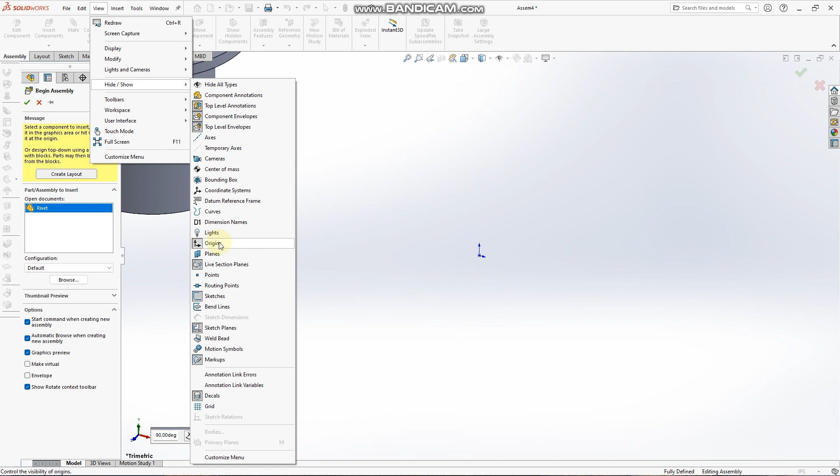Before we place the part, we go to View, Hide or Show, then we click on Origins so that our origin mark appears. We then put our cursor on the origin, and then we place our part.

Next, we click on Insert Component, then we click on our arm part. We place it at an appropriate position. We go back to View, Hide or Show, and remove our origin mark.

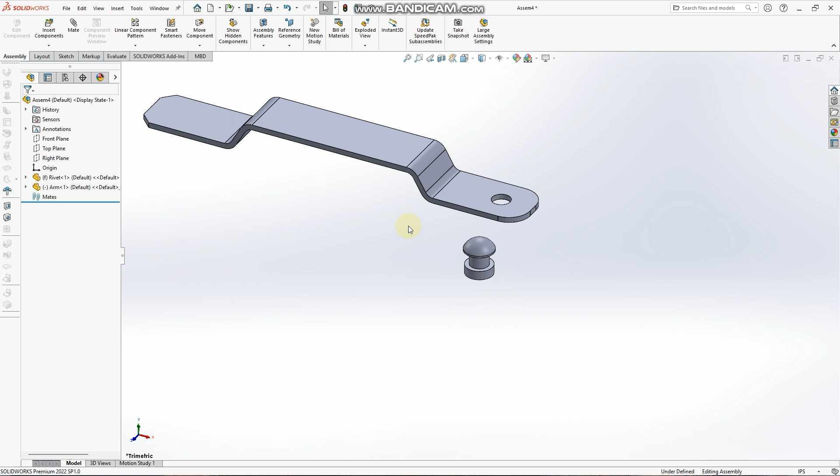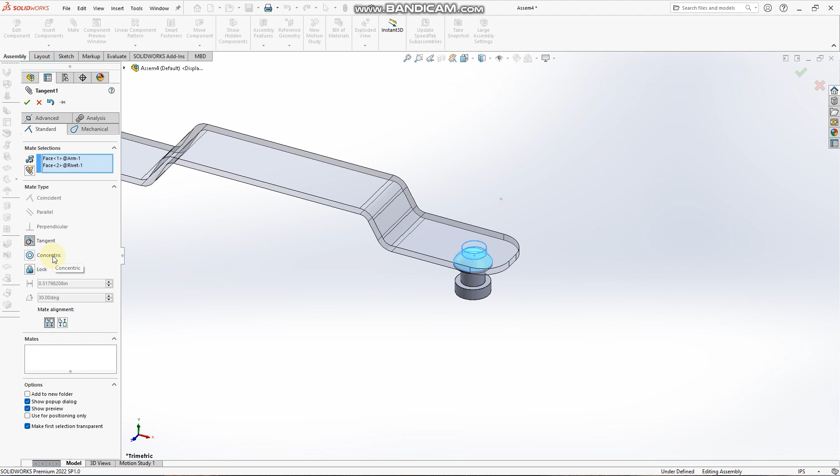Click on the inside face of the arm, the hole. We hold Ctrl, then we click on the cylindrical surface of the rivet. Then we click on Mate. Then under Mate type, we click on Concentric.

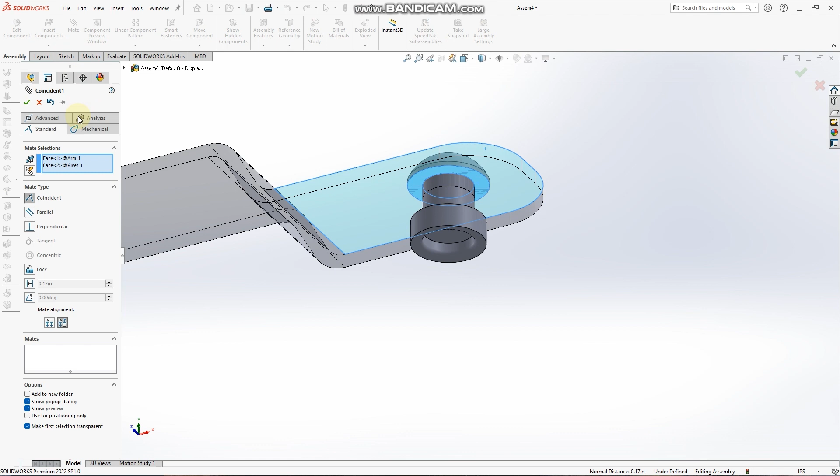Then click on the top surface of the arm, then we click on the bottom of the head of the rivet. Click on Mate, then we make it a coincident mate.

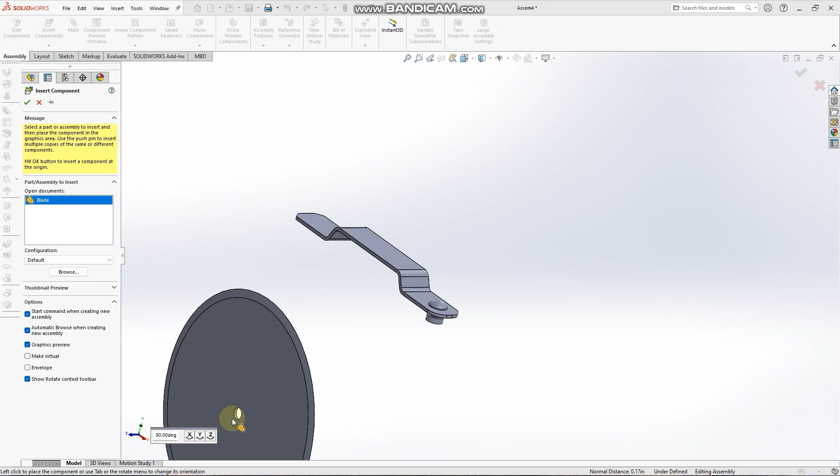Next, we insert our blade part. Before you place the part, there's this XYZ box that pops up. You can use it to rotate the shape and make it easier when mating.

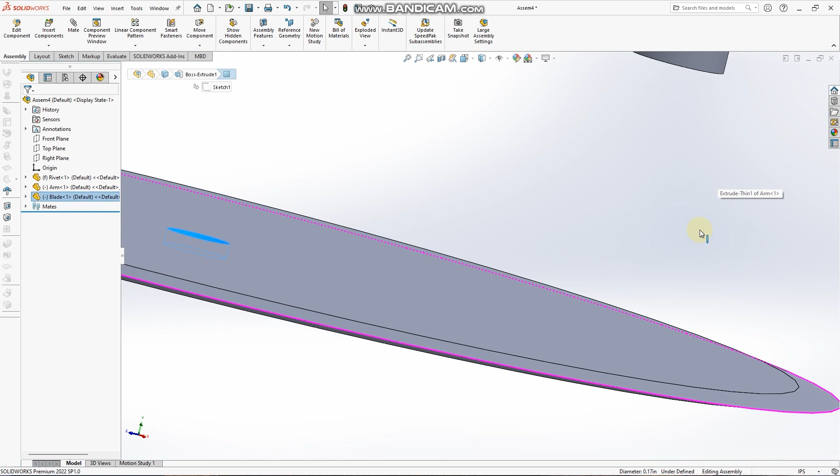We zoom in, we click on the hole face, the inner hole face of the blade. Rotate the shape, and then whilst holding Ctrl, we click on the cylindrical surface of the rivet.

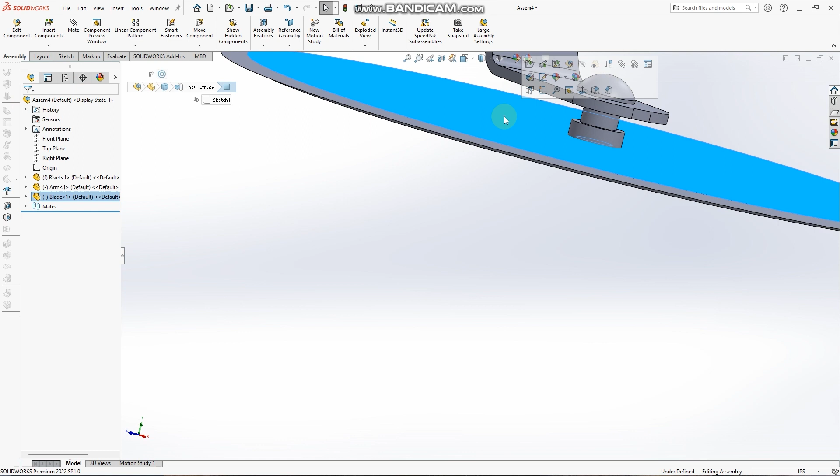We then create a concentric mate between these two faces. Next, we click on the surface of the blade. Rotate, let's bring the blade down.

Click on the surface of the blade. Rotate the shape, holding Ctrl, and click on the bottom face of the arm. Then we click on Mate. We make it a coincident mate.

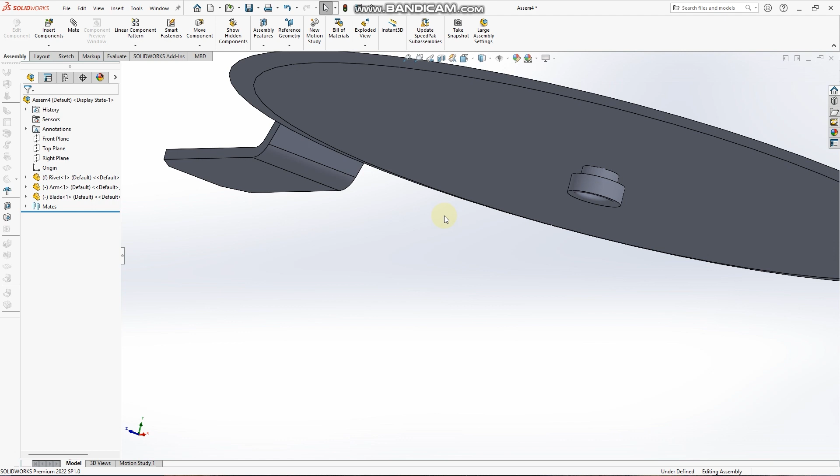Next, holding the Alt key, we drag from the arm to duplicate it, or you can either insert another arm from Insert Component.

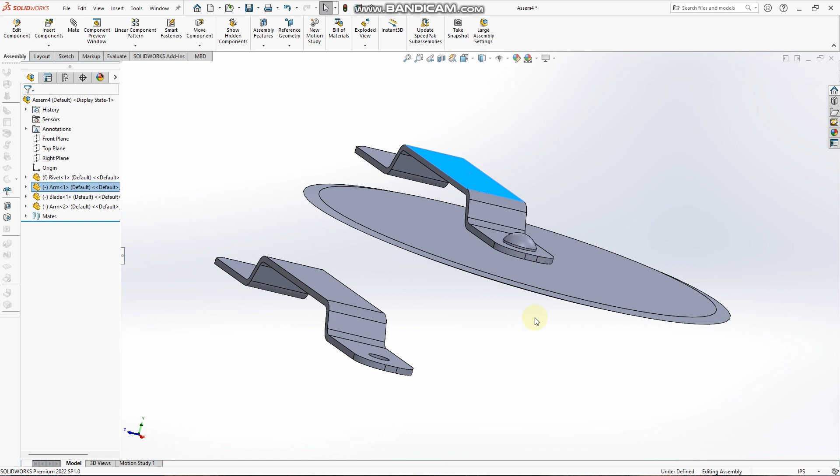Next, we come to our Feature Manager tree. Then we right click and click on Hide Components for Arm 1, and right click and click on Hide Components for Arm 2. We zoom into our second arm, click on the inner surface of the hole.

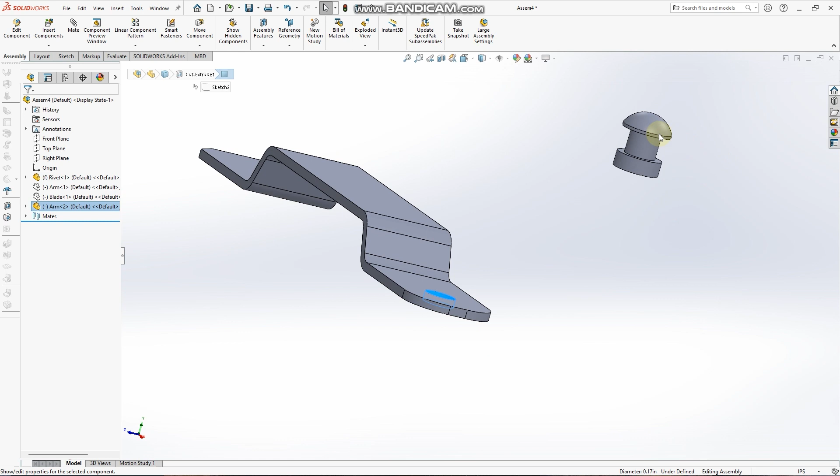Then we click on the cylindrical shank of the rivet. Then we click on Mate. We make this a concentric mate.

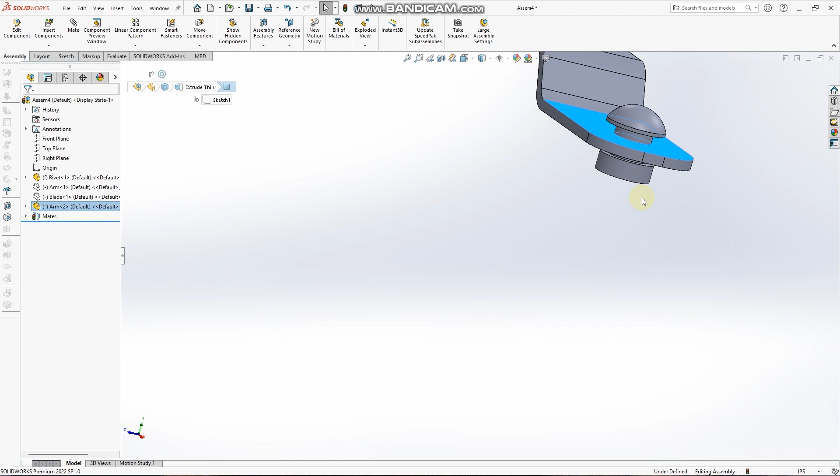Next, click on the top face of the arm. Rotate the shape, then we move this up a bit. Click on the top face, hold Ctrl, then click on the bottom face of the rivet.

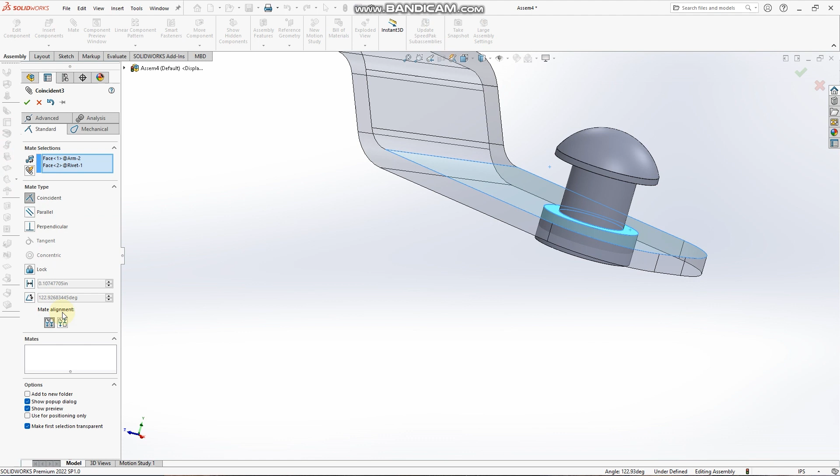Then we click on Mate. Then we create a coincident mate. Come down to Mate Alignment, then we click on Anti-Align. And our arm should flip.

We then show our first arm, then we show the blade.

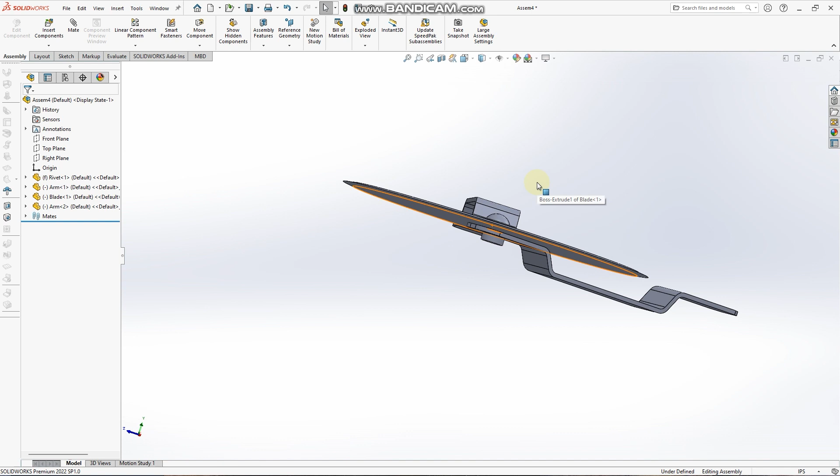To make it easier, you can move the second arm so that it's easier when we create the parallel mate.

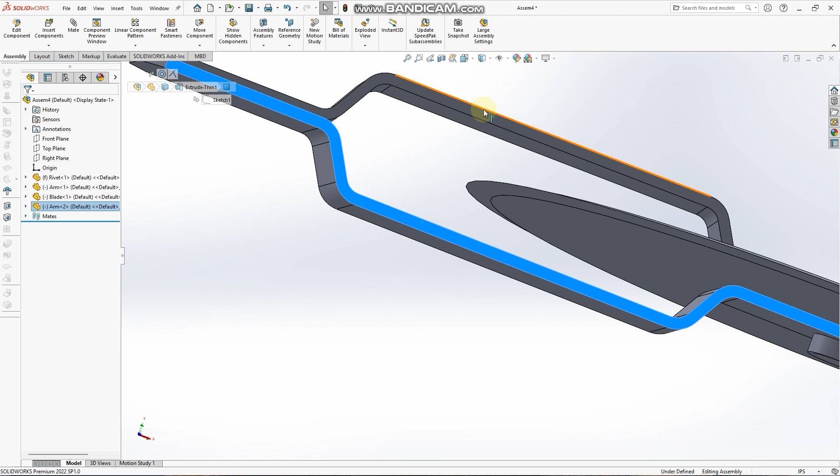So next, we zoom in, select this face of the second arm, holding control, then we select this face of the first arm. We click on mate, and under mate type we click on parallel, then we create the mate.

We zoom out, and now we have our completed mate.

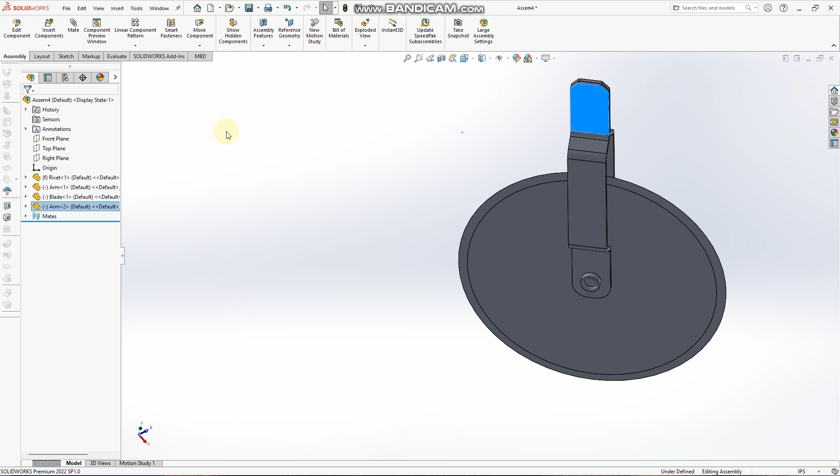We save our assembly as cutter assembly, and click on save.

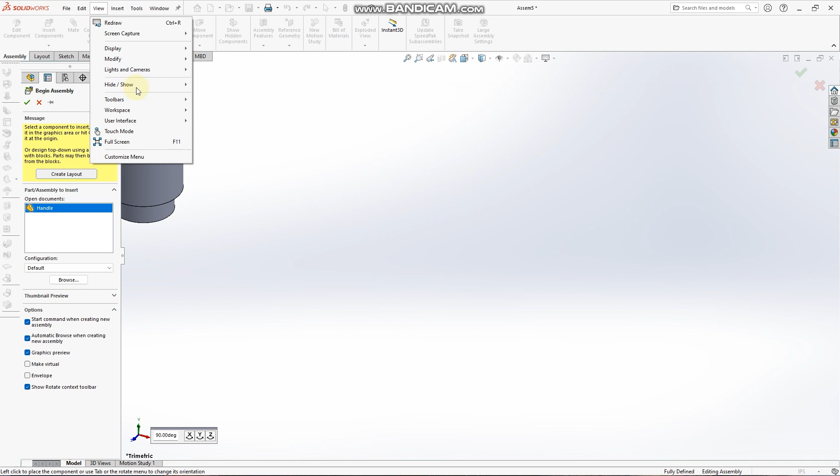We open a new assembly, and then for our fixed component we select the handle. Once again, before we place it, view, hide or show, then origins.

Click on this on the begin assembly tab so that it does not place our part yet. Move our cursor to the origin, then we click on it.

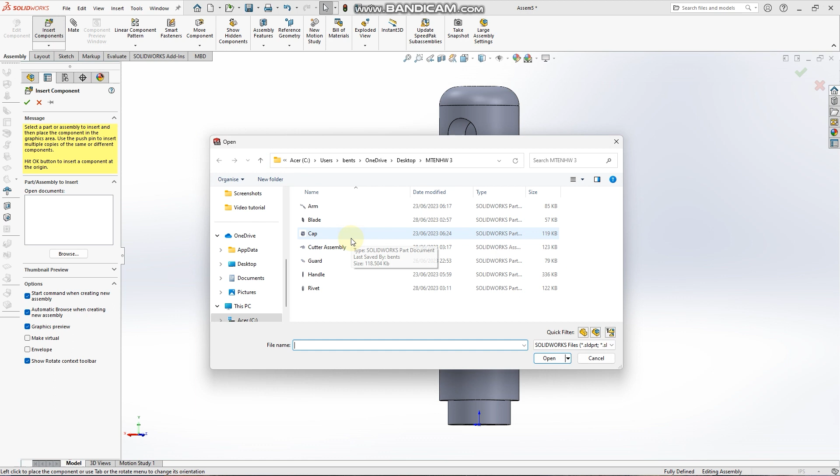Next, using insert components, we insert our cap. We use the XYZ box to rotate the cap to make it easier for us to mate. And then hide our origin mark.

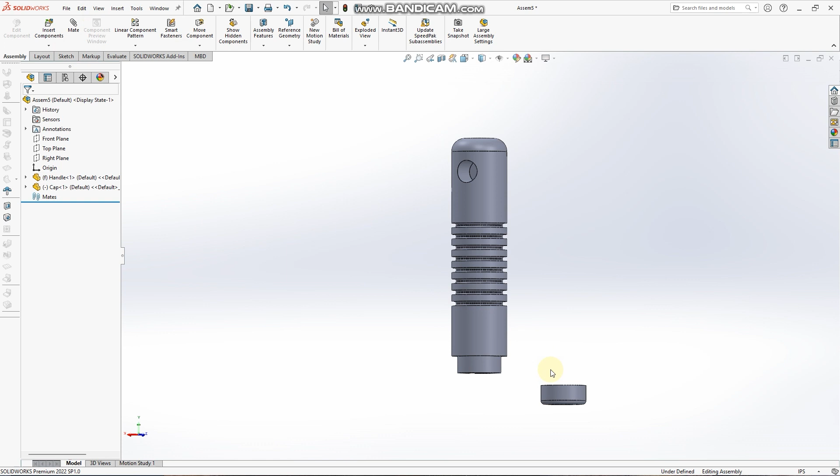Next, this face of the handle, and then we click on this edge of the cap, then we click on mate, then we create a coincident mate between these two faces.

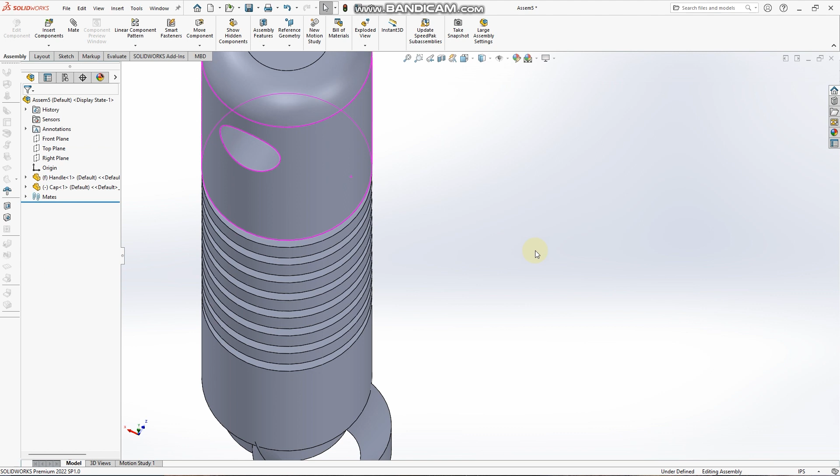Zoom out, we click on this face of the handle, holding control, and then we click on the inside face of the cap. Then we create a concentric mate between these two faces.

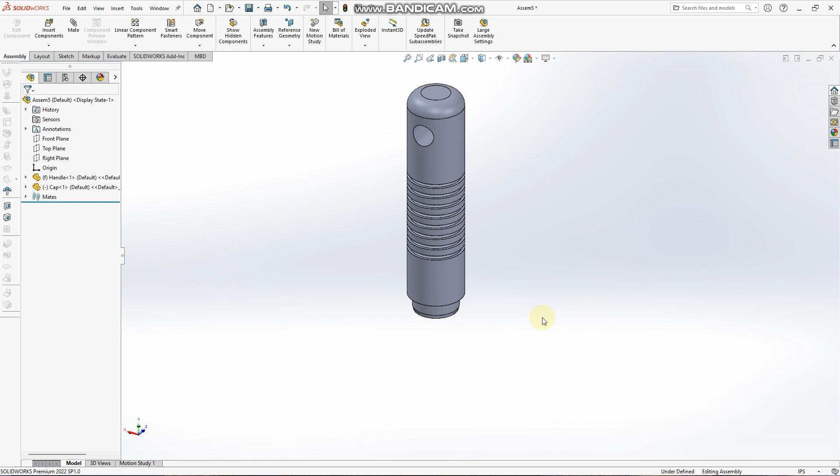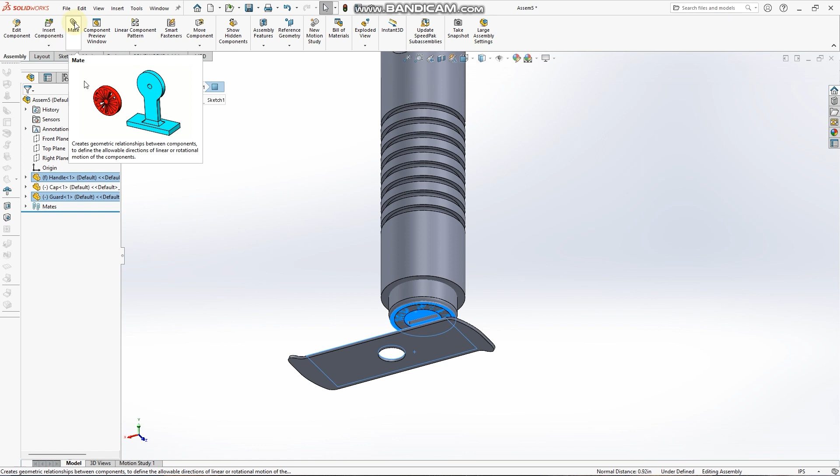Next, we bring in our guard. Then click on the top surface of the guard. Zoom in, click on our bottom face of the cap. Then we click on mate. Then we create a coincident mate between the faces.

Next, we click on the handle.

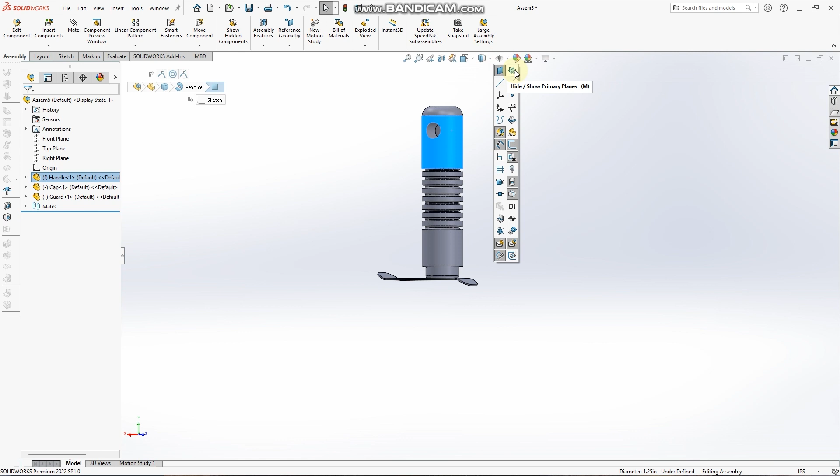We click on the handle, move to the eye icon, click on view planes, then hide or show primary planes so the planes of the assembly show. Then we do the same for the guard, clicking the eye icon and showing the planes.

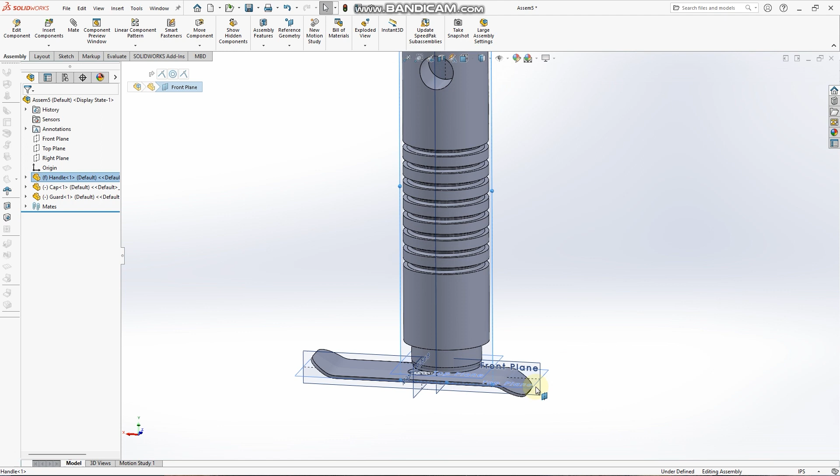Next, we select the front plane of the handle, holding Control we select the front plane of the guard, then we create a coincident mate between the two planes.

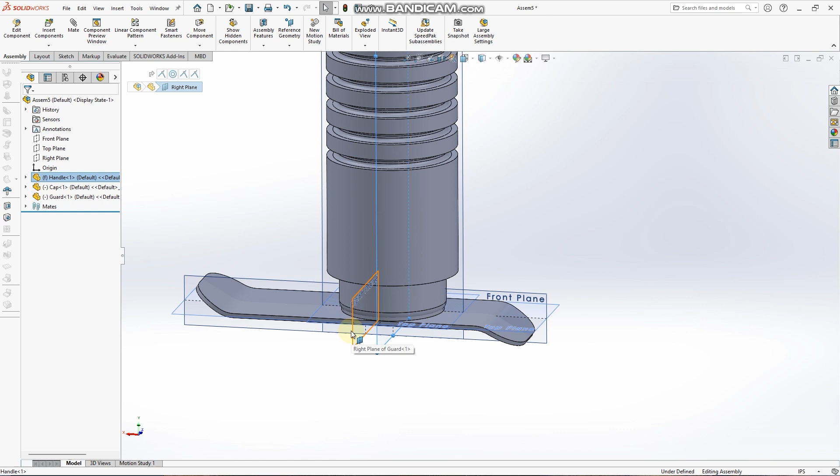Next, select the right plane of the handle, holding Control, then select the right plane of the guard. Then we create a coincident mate between these two faces. Click on the handle, the eye, then hide primary planes, and we do the same for the guard.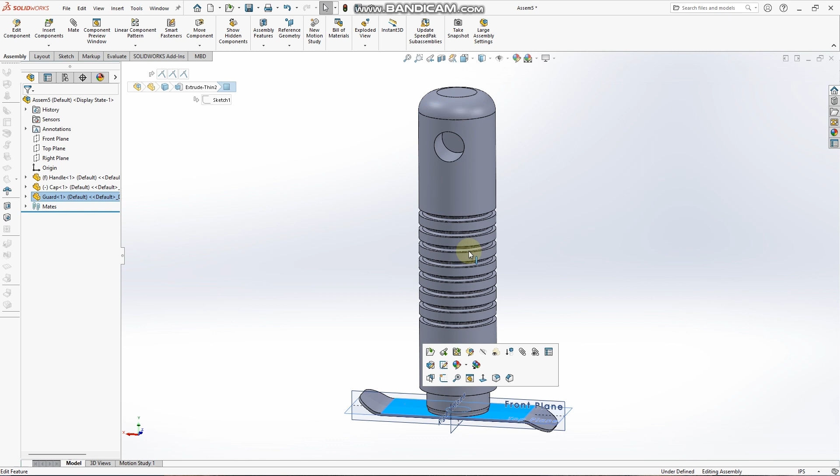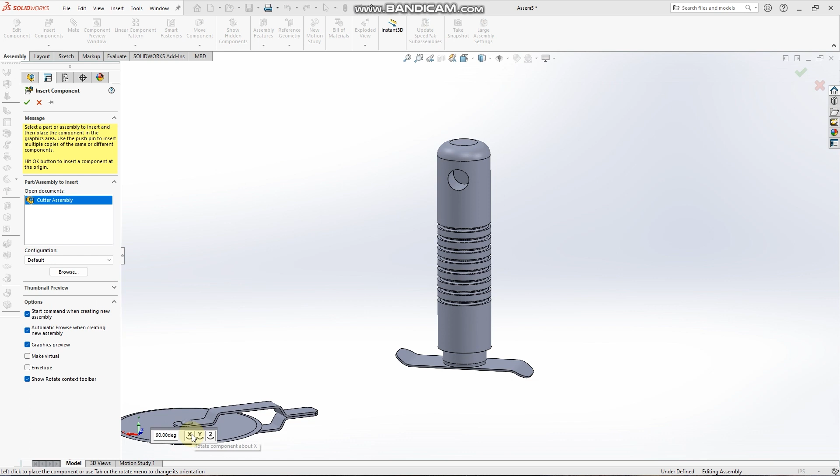Next, we bring in our cutter assembly using insert components. Using our X, Y, and Z rotations, we try to get correct alignment of the shape.

I think this will do. Let's bring it downwards.

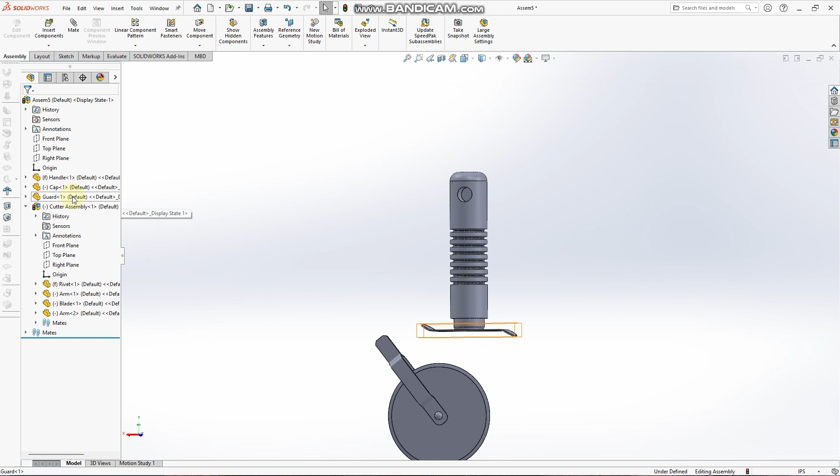Go to our design tree, then we hide our guard by right clicking and clicking hide components. Then we hide our cap by right clicking and clicking on hide component.

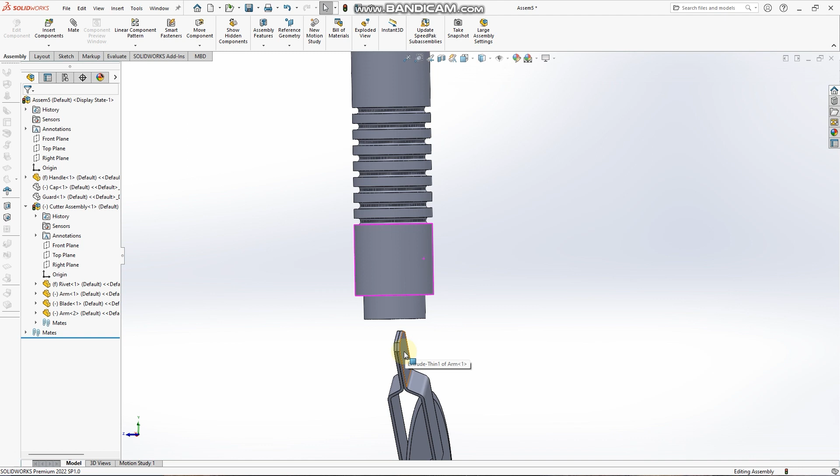We zoom in, then select this face of one of the arms. Let me position our cutter wheel.

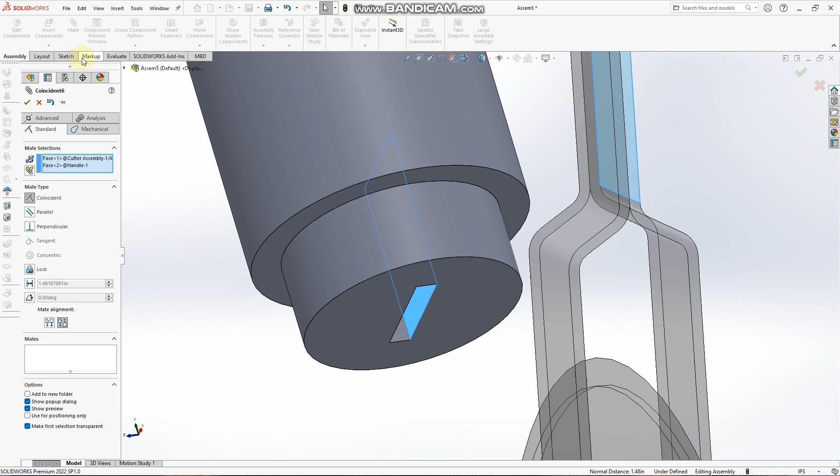We select this face, one of the arms, rotate the handle, and then select this inner face of the handle. Then we click on mate and create a coincident mate between these two faces.

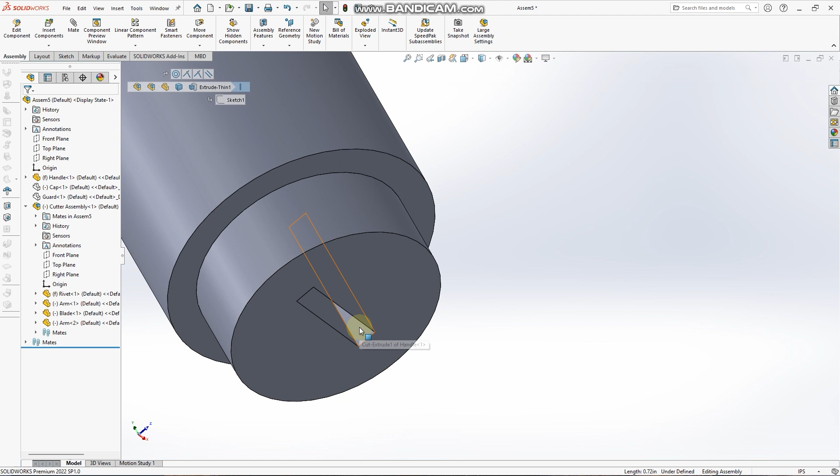On our cutter, we click on this edge between the two arms. Holding Control, we rotate our handle, then click on this inner face of the handle, then create a coincident mate between them.

So now we should be able to move our cutter through the whole of the handle.

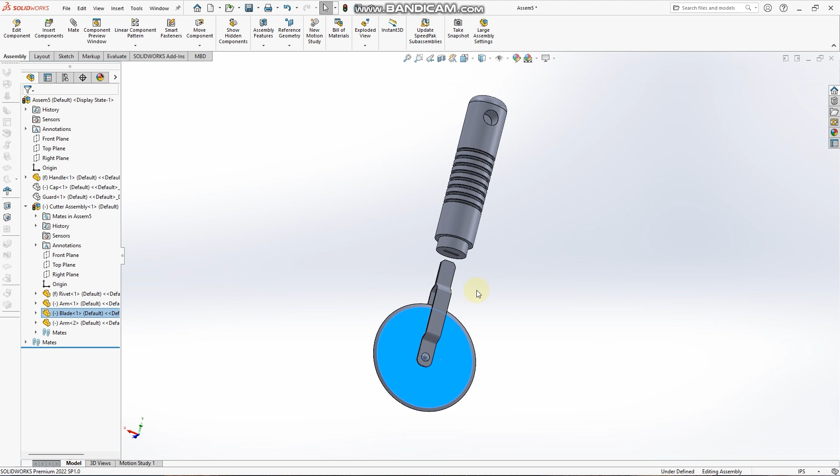Next, we show our cap, then show our guard. We zoom in and click on the bottom face of our guard, holding Control.

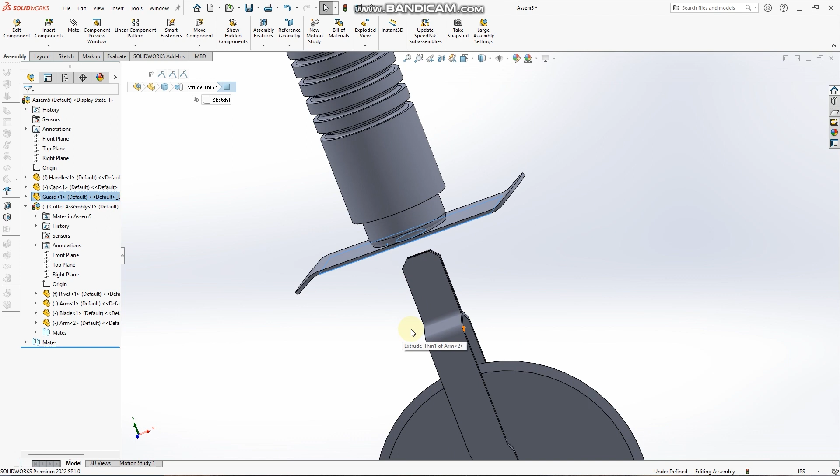Then on our cutter, we click on this edge, holding Control, and create a coincident mate between these two faces.

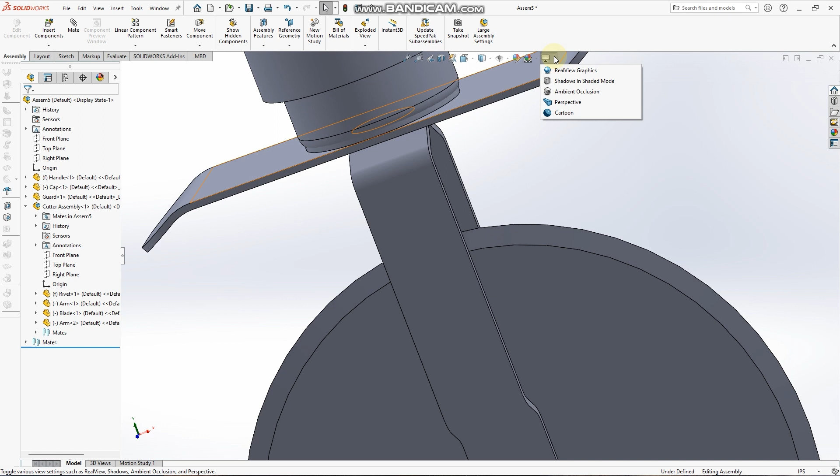We then go to Tools, then Evaluate, then Interference Detection. We click on Calculate, and it shows us that the hole in our guard does not complement the mate with the cutter.

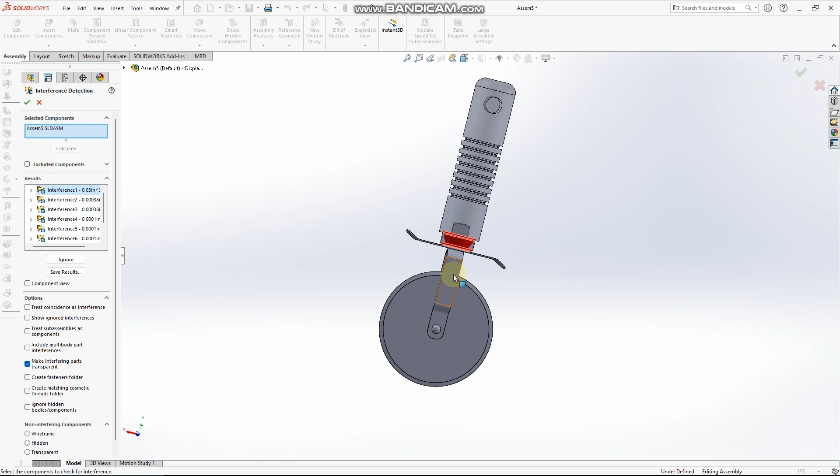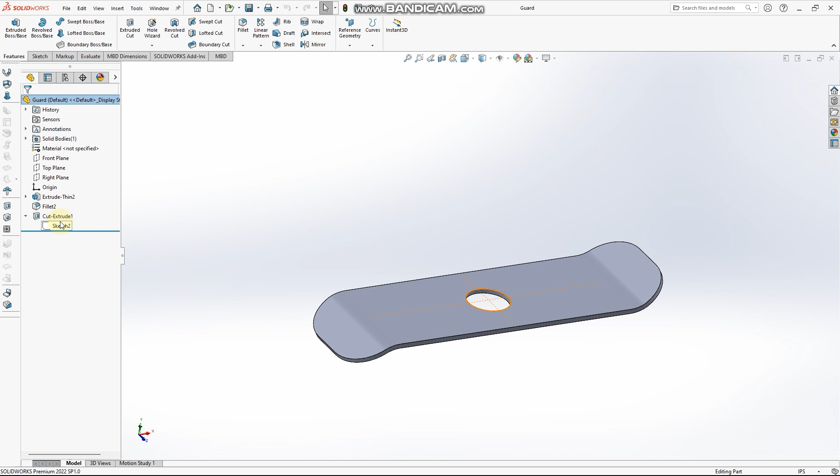So we open our guard part, and under the cut extrude feature, we right click on our sketch and select edit sketch.

We bring our cursor to the circle and delete it. Using the line tool, we then create the shape.

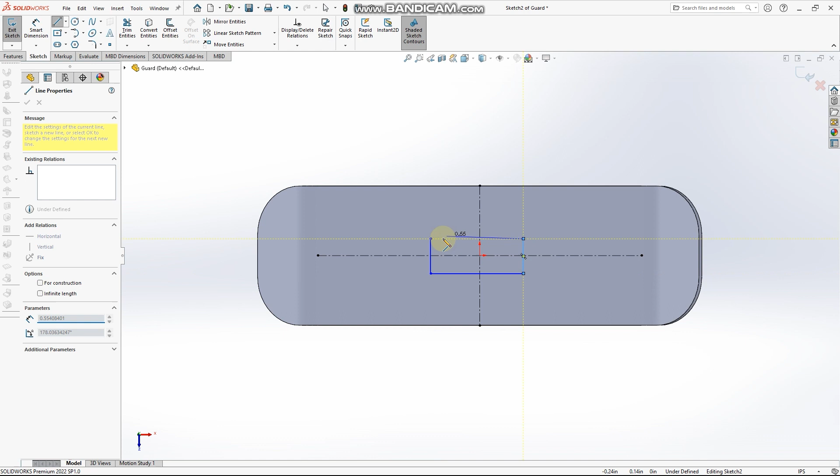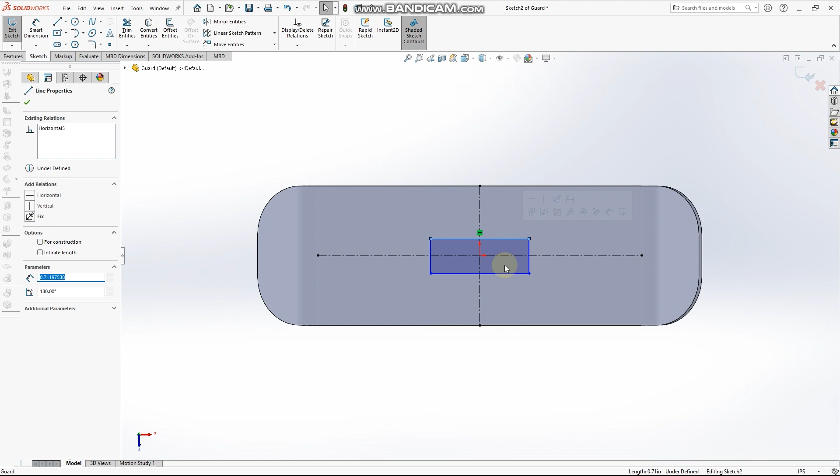Click on this line, holding Control, click on the center line, then click on this line, then click on Symmetric. We repeat this for the other side: click the line, holding Control click the center line, click the other line, then click Symmetric again.

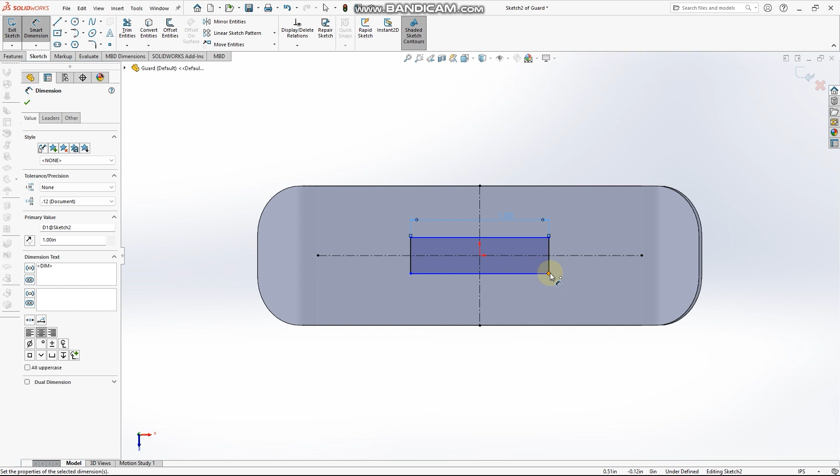Using Smart Dimension, we dimension from this line to this line and type 1, then we dimension from this line to this line and type 0.096.

Next, we do not need to create any extrude cuts, we just accept the sketch, and our new hole should be created.

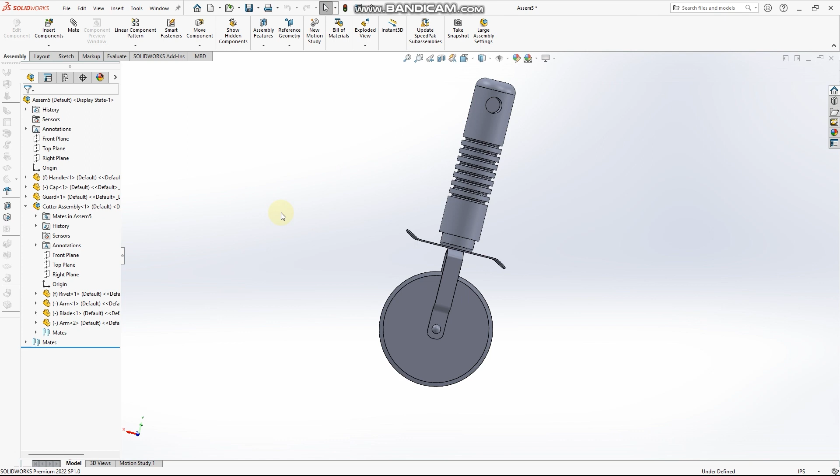So now we'll move to our assembly, then click on the rebuild icon.

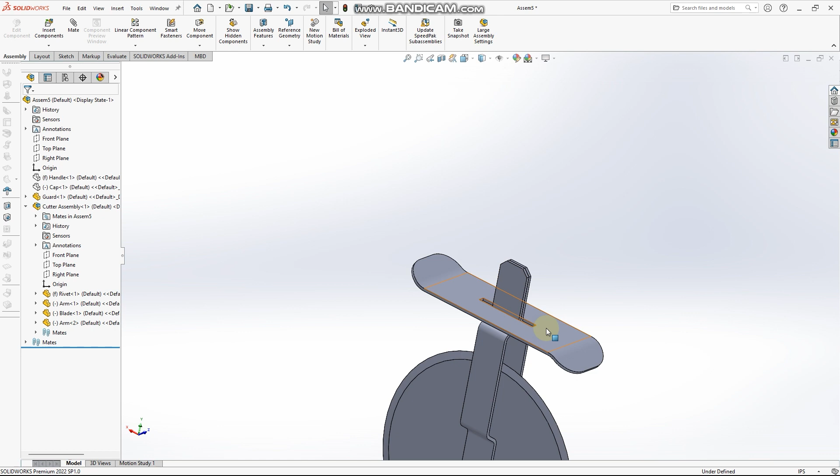We hide our cap, then hide our handle. You should see that our hole has now been changed, and it correlates with the cutter.

Insert, then exploded view.

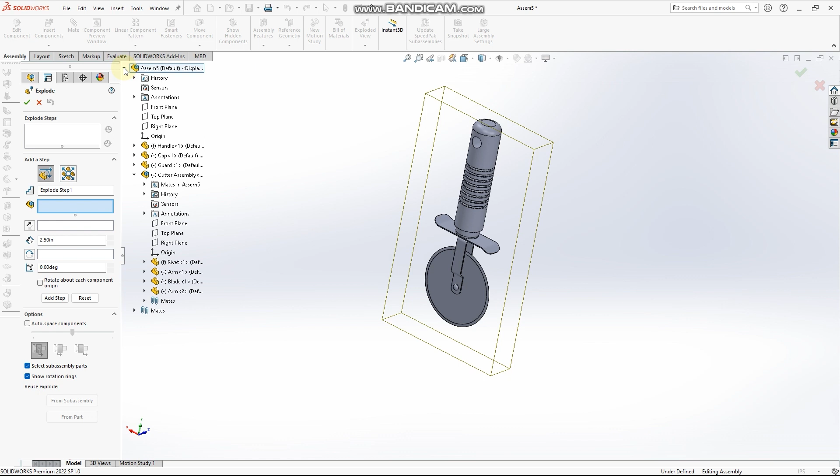We then click the drop down for the feature manager design tree. Now it's not dropping down... okay, then we click on our cutter assembly.

We then zoom in, bring our cursor to the y-axis, and drag it down a little bit. Then we type 2 inches and click on done.

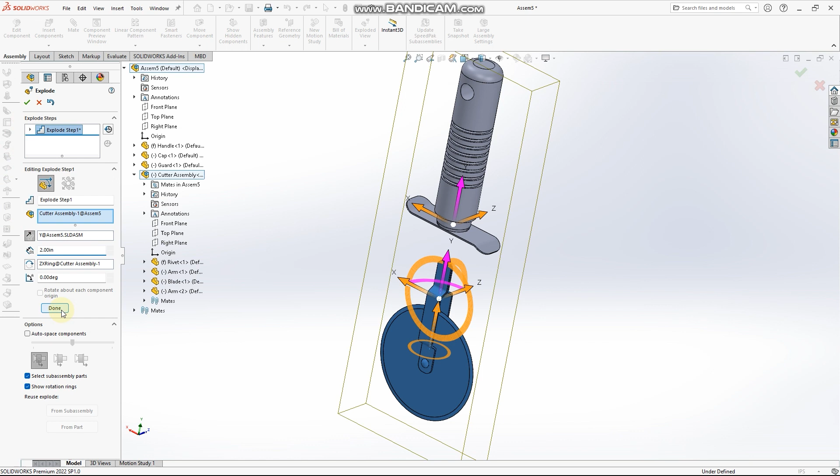Under the cutter assembly, we click the drop down, then click on our rivet part. If your rivet is not selecting but the cutter assembly is selected, make sure you click on select sub assembly parts, so that it selects the individual parts of the cutter assembly.

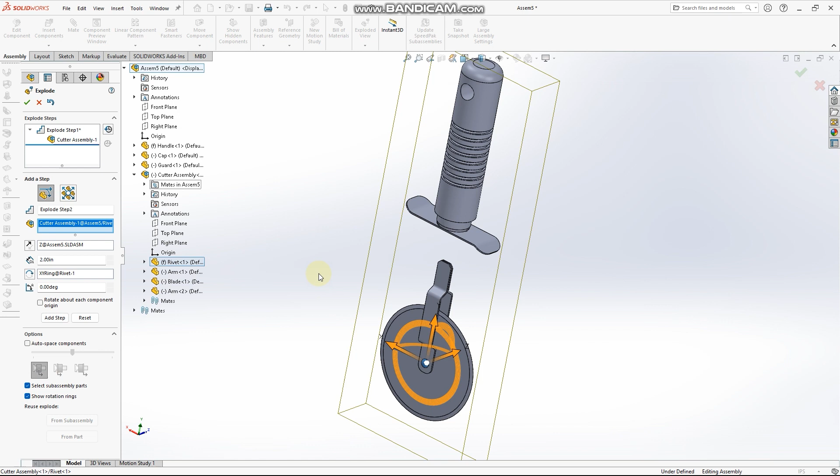We then zoom in, place our cursor on the z-axis, and move our rivets forward a little bit. Then under the distance we type 4 inches and click on done.

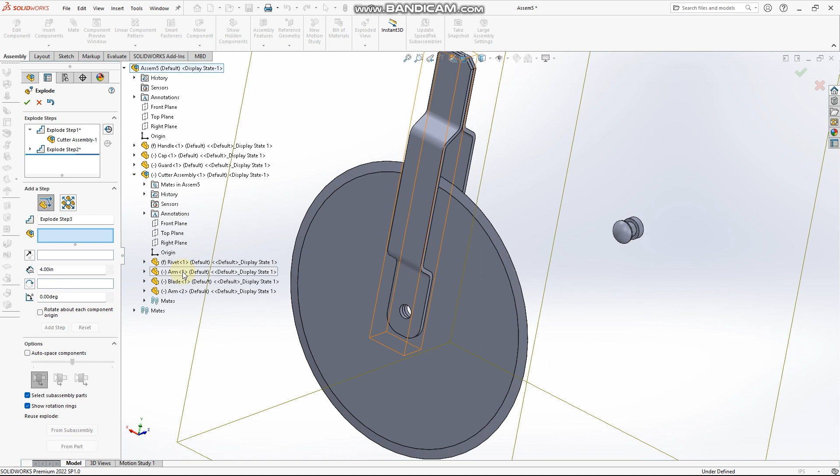Still under the cutter assembly, we select our first arm. We put our cursor on the z-axis and drag it backwards a little bit. Then for the distance we type 2 and click on done.

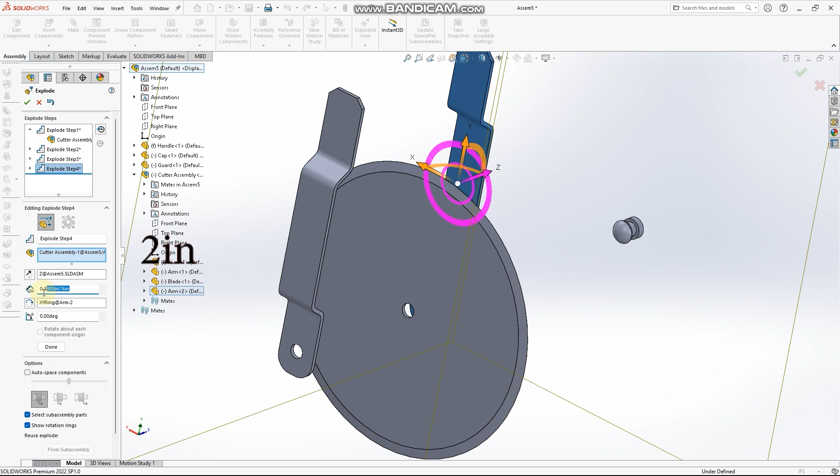Click on the second arm, put the cursor on the z-axis, move it forward a little bit, then type 2, and click on done.

Next, we select our guard, put our cursor on the y-axis, and drag it downwards a little bit. Then we type 2.5 and click on done.

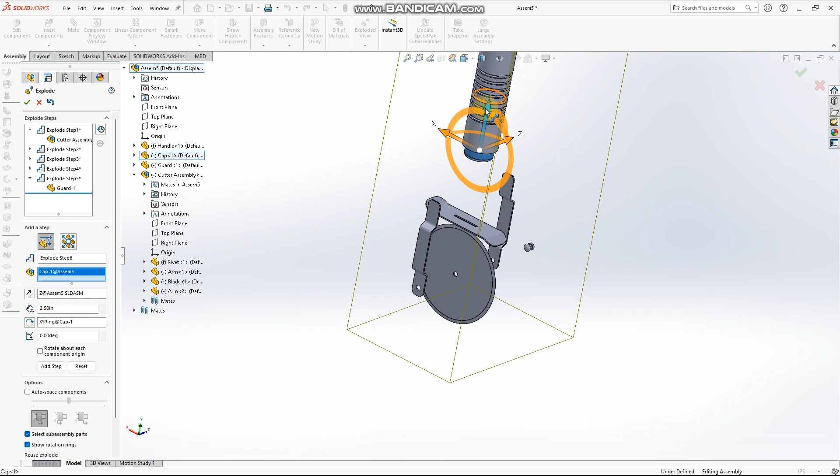Next, we click on our cap and drag the y-axis downwards a little bit. Then we type 1.5, and now we should have our exploded view.